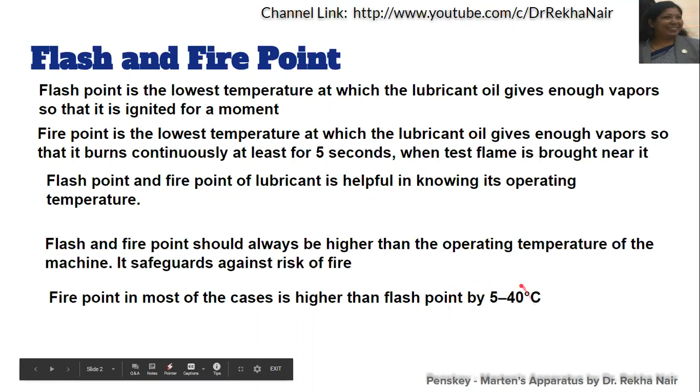Okay, so these two quantities, flash point and fire point, will be helpful in knowing its operating temperatures. Flash point and fire point should always be higher than the operating temperature of the machine, or else we can say that the operating temperature must be lower as compared with the flash and fire point, so that it will help to safeguard against the risk of fire. Fire point in most of the cases is higher than flash point by about 5 to 40 degrees centigrade.

This is a Pensky-Martens apparatus. It will look like this, and this is the diagram. Let us explain one by one. Construction part: it contains an oil cup. The oil cup is made up of brass, which is 5 centimeters deep and 5.5 centimeters in diameter. The lid has 4 openings. One is for the stirrer, second is for passage of air, third is for the thermometer, and fourth is for introducing the flame.

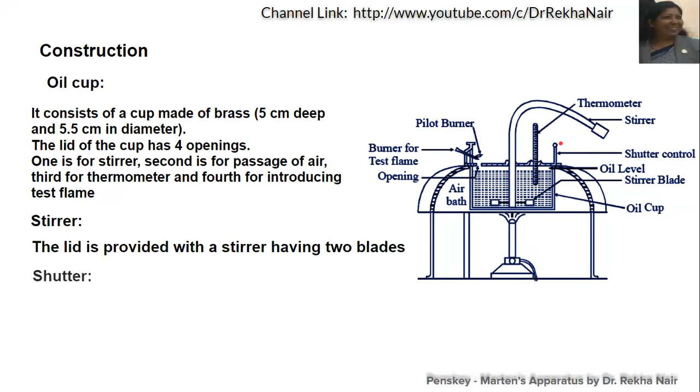Okay, now this is a stirrer. The stirrer is provided with 2 blades. This is the shutter control. The shutter control is provided at the top of the cup, and by moving this shutter control, this lid will open up and the flame will be introduced inside this oil cup. Okay, here it is. There is a pilot burner which introduces the flame to the burner, and this burner will introduce the test flame into the oil cup.

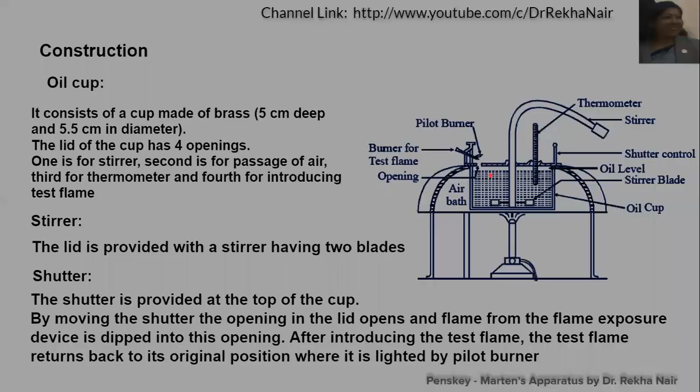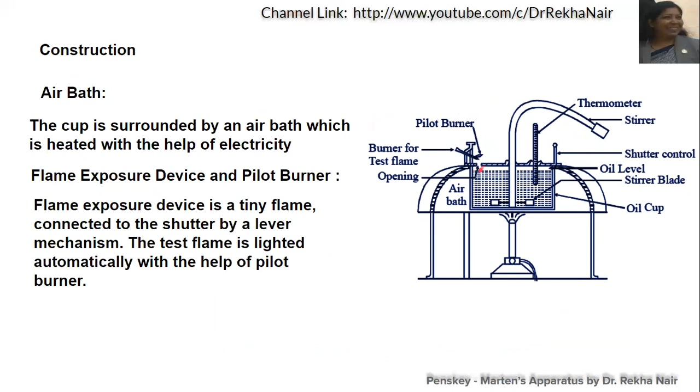Okay, this is the air bath, so that there are no heat losses. This is a flame exposure device. As I explained, we call it the pilot burner and flame exposure device. This pilot burner will introduce a tiny flame, this burner will get lit, and this flame will be introduced inside, controlled with the help of this shutter control. The test flame will be lighted automatically with the help of the pilot burner. Once the shutter control is open, this will introduce flame into this opening where there will be vapors of this lubricant which will get burned.

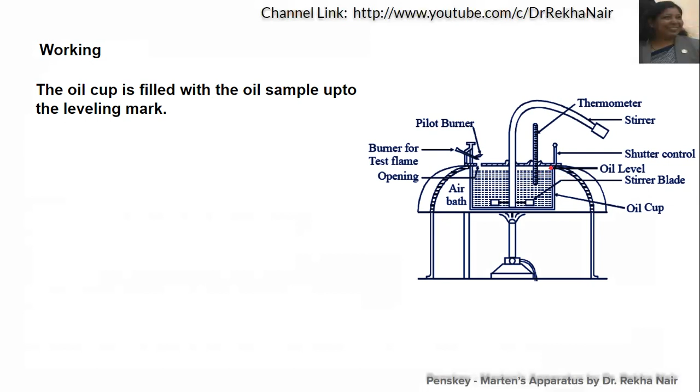Now let us discuss the working. The oil cup is filled with oil sample up to the leveling mark. Okay, this is the oil level. There is a mark there. It is then heated with the air bath. By using the air bath, we heat it. The thermometer in the sample will read the temperature. This is the thermometer that will give the temperature of the oil. Now stirring will be done.

At every degree centigrade rise of temperature, this test flame will be introduced at the opening, and we'll check whether it is giving any flame or burning or not. So for a moment it is introduced, and we will check at every degree centigrade rise in temperature, and there will be a minimum temperature where this will give a momentary flash. We'll note the temperature, and that temperature is nothing but the flash point. The temperature at which it gives a momentary flash is the flash point. The temperature will be noted with the help of the thermometer.

So at every degree centigrade, we have to introduce the flame. We will be opening this with the help of the shutter control. We will be opening and closing, introducing flame for a second, and checking whether that is giving a momentary flash or not. The lowest temperature at which it gives a momentary flash is nothing but the flash point.

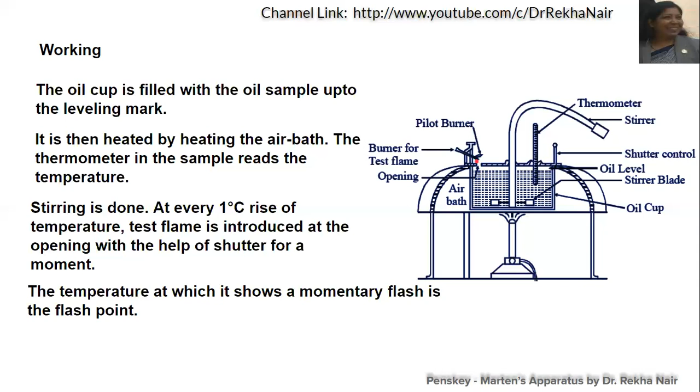And the procedure will be continued for around 5 to 40 degrees. The difference may be about 5 degrees centigrade, about 20 degrees centigrade, or about 40 degrees centigrade. So above that, there will be a point at which the oil vapor catches fire and it will burn for about 5 seconds. That temperature will be noted with the help of the thermometer, and it will be called the fire point. So the temperature at which it gives a momentary flash is the flash point, and the temperature at which the oil vapor continuously catches fire and burns for 5 seconds is its fire point.

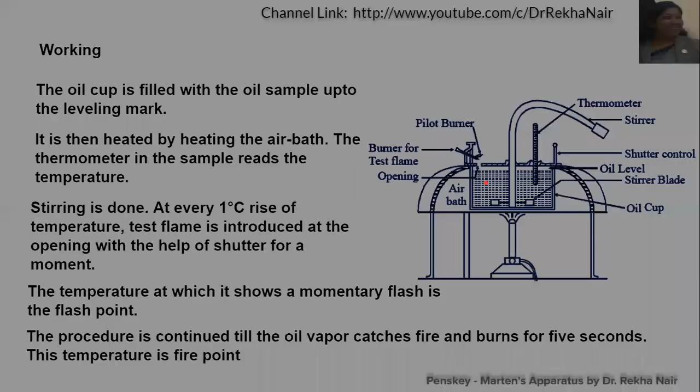So this is the equipment. We can see all the parts. This is the stirrer. We have thermometer for temperatures and all. This is the shutter control by which we open the system and we introduce the test flame with the help of the pilot. That's all for today.